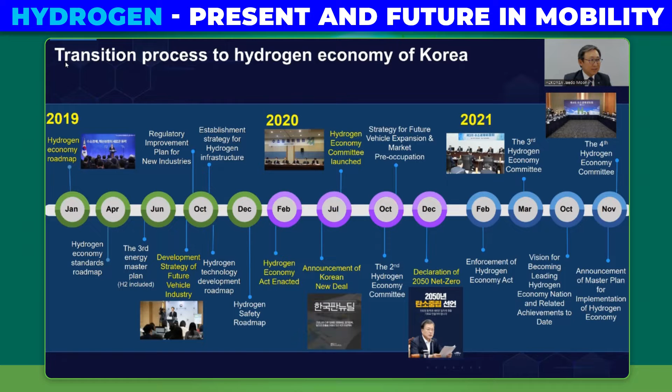In February 2020, the world's first hydrogen law was enacted, a basic law aimed to foster the domestic hydrogen industry. In December of the same year, Korea declared to achieve carbon neutrality in 2050, which became the core of the energy conversion policy. In November 2021, the basic plan for implementing the hydrogen economy in Korea was established. Now, let me tell you about the current state of the hydrogen economy in Korea.

Korea is pushing for a transition to a hydrogen economy for carbon neutrality in 2050, and is creating a hydrogen ecosystem to revitalize the hydrogen industry. Currently, about 22,000 hydrogen cars are supplied and operated in Korea, with 157 buses and 20 taxis in operation.

In addition, 162 hydrogen refueling stations have been built and operated across the country, and about 250 stations are expected to open by this year. Fuel cell power generation is operated at 53 sites in Korea, and about 790 megawatts of power is produced.

The following is the current status of the hydrogen industry being promoted by local governments in each region of Korea. As you can see here, Korea is promoting hydrogen industry-specific projects such as hydrogen-related cities, hydrogen production clusters, R&D specialized cities, and hydrogen mobility clusters. There will be more business opportunities in the future, and a visible hydrogen society will unfold by 2030.

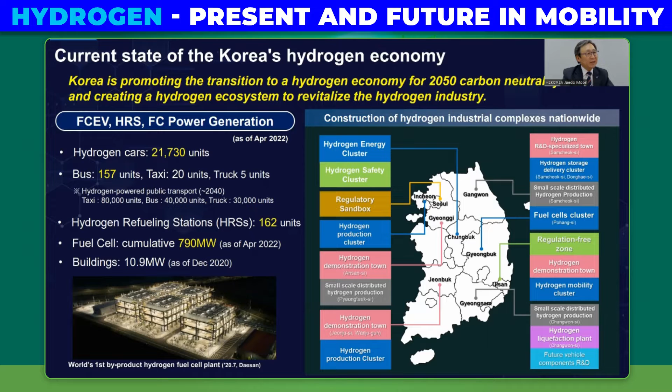To this end, Korea is preparing to expand this hydrogen ecosystem. The development of hydrogen cars is planning to expand to various mobilities. It is also promoting mixed power generation of hydrogen and ammonia in carbon-free electricity production. In order to reduce industrial carbon fuel, we are developing hydrogen fuel use methods in steel, cement, and petroleum processes.

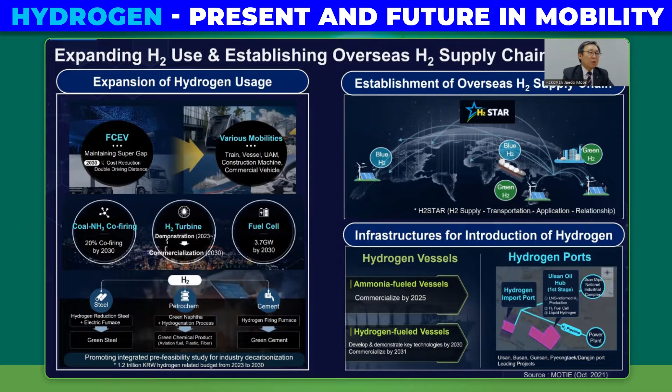In addition, it is promoting the establishment of an overseas supply chain of hydrogen required for the sustainable growth of the hydrogen industry. To that end, we plan to expand our hydrogen infrastructure. Korea has the world's best technology for hydrogen cars, and based on this, a strategy for developing hydrogen mobility was created.

Korea plans to expand its application to mobility such as trucks, trams, and ships, not limited to passenger cars and commercial vehicles. To this end, it will focus on improving the performance of hydrogen mobile fuel cell systems and securing economic feasibility by 2030.

In particular, I would point out that technical cooperation is being promoted between Korean and Czech companies to establish a hydrogen mobility ecosystem. A great technological synergy between the companies is expected.

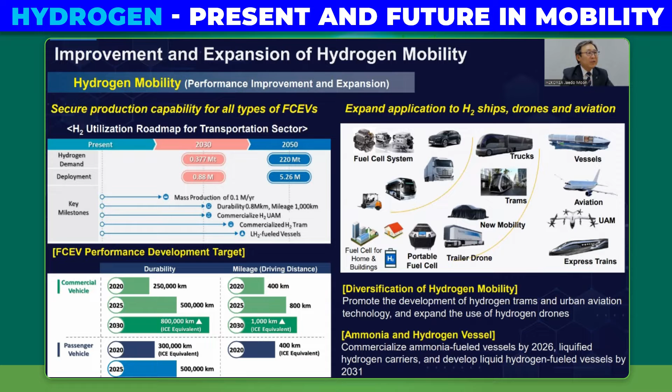In Korea, there are many companies with excellent technologies such as hydrogen charging and hydrogen distribution, including Hyundai Motors. I hope that international cooperation in the hydrogen industry with V4 countries will be actively promoted in the future. We are going to expand the hydrogen supply chain to move into the hydrogen economy.

To this end, we plan to expand the supply of hydrogen through demonstration of hydrogen incorporation by utilizing natural gas pipelines nationwide. To this end, we'll expand the construction of hydrogen pipe networks around the hydrogen production and transportation areas.

By 2025, it will be based on hydrogen ports, hydrogen cities, and industrial complexes, and will be connected to the LNG pipeline by 2030. And by 2050, there will be a piping network centered on 4 major metropolitan areas across the country.

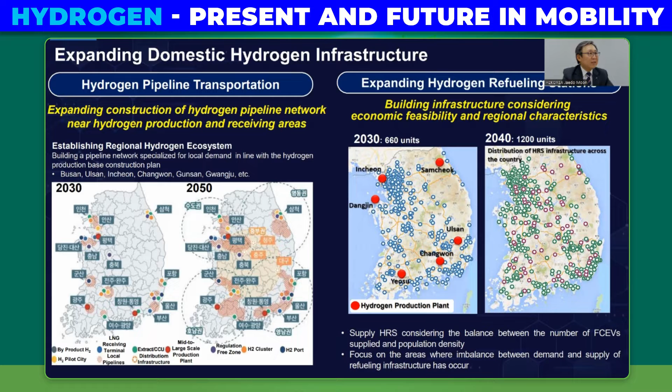In addition, the construction of hydrogen refueling stations and hydrogen production bases will be accelerated to expand the supply of hydrogen mobility. To this end, it plans to secure a nationwide hydrogen refueling network by transforming existing gas stations or LPG stations into complex refueling stations.

Let me explain Korea's hydrogen utilization strategy. Korea plans to gradually reduce existing coal-powered power plants with a goal of carbon neutrality and plans to utilize hydrogen. First of all, from the middle of the 2020s, fuel cell power generation facilities and ammonia mixed systems in coal power plants will be expanded. The ammonia blending method of coal-fired power plants is planned to operate 20% of ammonia by 2030.

In addition, based on the goal of commercialization by 2050, through the development of hydrogen generation gas turbines, we will promote carbon dioxide reduction by increasing hydrogen utilization in the industry. It is also planning to expand the use of hydrogen energy in steel, petrochemical, and cement industries that emit a lot of carbon.

For example, the steel production process will establish a test site for a hydrogen reduction process of 1 million tons by 2030, expand it to 3 million tons by 2040, and completely convert existing furnace facilities to a 100% hydrogen steel process by 2050.

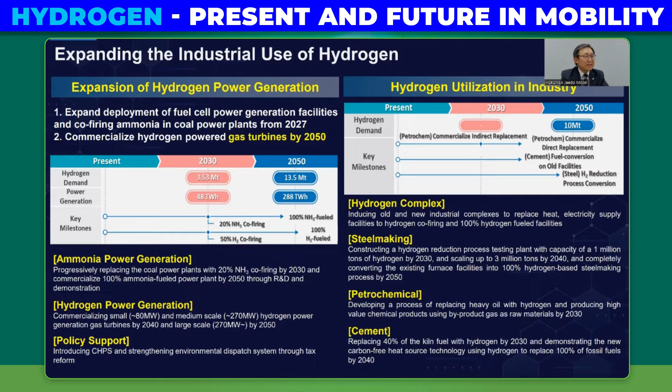In addition, the petrochemical process aims to develop a process that replaces heavy oil, the fuel of a petrochemical process, with hydrogen by 2030. As mentioned earlier, Korea is actively promoting to establish a network to introduce clean hydrogen from overseas in the mid to long term.

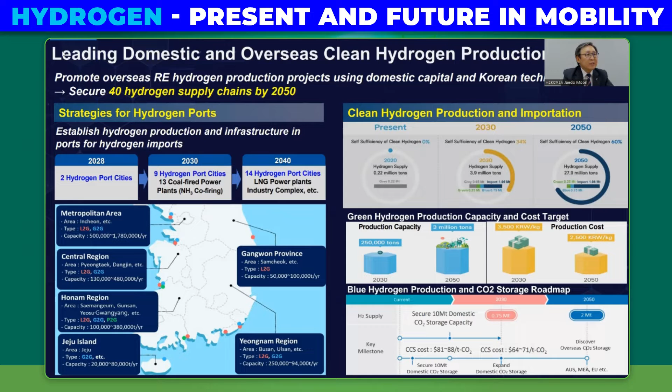Korea is expecting to establish 40 stable overseas hydrogen supply chains by 2050, encompassing both blue and green hydrogen. A hydrogen port construction plan is also being prepared for this. The number of hydrogen ports will increase from 2 by 2028 to 9 by 2030. In addition, hydrogen production and infrastructure construction in hydrogen import ports will be promoted.

Lastly, I would like to introduce the Global Hydrogen Industrial Association Alliance, GHIAA, which was recently established to promote global hydrogen cooperation. H2 Korea, together with 17 hydrogen associations in each country, launched the GHIAA in Seoul to promote international hydrogen industry cooperation. The purpose of GHIAA is to promote the growth of a global hydrogen industry and the expansion

of the international hydrogen market by revitalizing private global hydrogen economic cooperation. Through this, it will promote the transition to a hydrogen society and contribute to overcoming the global climate crisis. The organization will play a pivotal role in promoting private international cooperation with the 18 hydrogen industry associations. Please support and join us in the initiative.

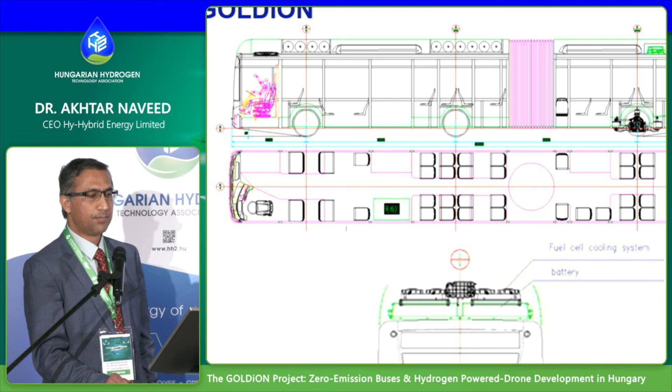So our idea was to consider 12 meter and 18 meter as the fuel cell bus, and the smaller, which is 8.5, and the 12 meter is a battery electric bus. The reason behind, I think many of you already know, is that when you look at the battery drivetrain, there is a tipping point when it comes to the range, because the longer you want to drive, which means a long haul drive, the battery becomes heavier and heavier. And there would be a point where it doesn't make any sense to use batteries.

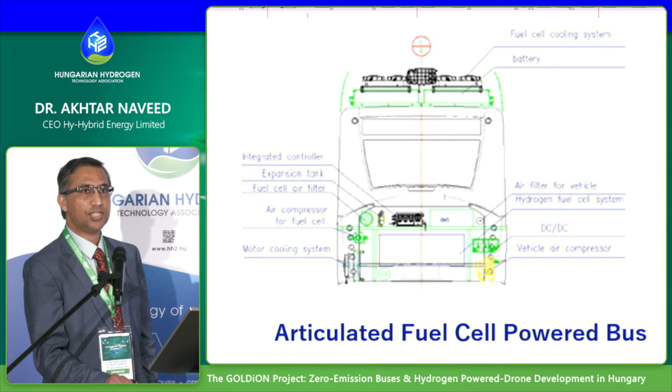That's why, if you look at the ships, for example, specifically the planes, the long haul planes, once you go to, let's say, 200 or 300 miles, then you have to only look at hydrogen as a solution, because battery would not work there.

So in our analysis, we did quite a detailed economical and also technical study to find out where the tipping point would be between these drivetrains, and decided 12 meter is the ideal tipping point. So if we are below that, then we can live with battery. And if we are above 12 meter, then the only solution which makes sense from a driving range would be the fuel cell bus, and that's the tipping point.

Now, looking at the pictures of the bus, many of you may not have heard about that, but the reality is these E9 and E12, which are the battery electric buses, are in Hungary right now. And the H12, which is a 12-meter fuel cell bus, has been recently completed in cooperation between Hyzon Motors and us. And many of you know Hyzon Motors is a big player when it comes to fuel cell engines.

So these guys are supplying the engines to those bus families, for the 18-meter fuel cell bus and also the 12-meter. The 18-meter is the one which is in a development stage. The other buses are ready.

With respect to the 18-meter bus, I'm just giving you a highlight of how the drivetrain looks. So you would see on the roof of the H18 bus there is a fuel cell cooling system, next to that there is a battery, and you can also see the hydrogen storage tanks. They are located on the roof, and there are nearly 12 hydrogen tanks powering this bus. And again, we decided to extend the range as much as we can, but there is a limitation on how much load we can put onto the bus.

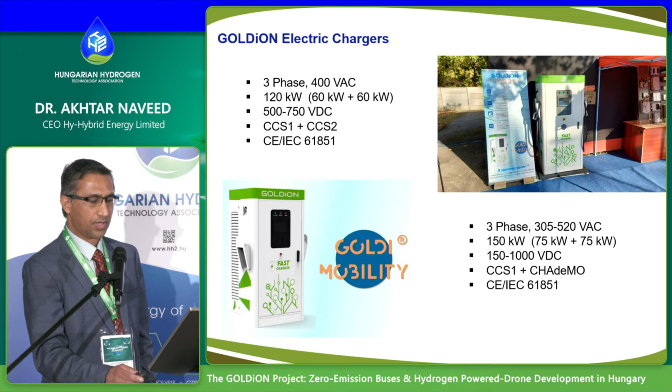So moving on, I think it's less relevant for this conference, but as I mentioned, I like to be hybrid with hydrogen. So these are the electric chargers which are used for our battery buses here as well.

So that's why we are looking at other, local solutions, where we can find some kind of mobile refueling stations. In this case, it is a very small station where you can refuel up to 200 kilograms a day.

And this could suit like 4 to 5 buses a day, basically. So if you think about each bus carries 40 kilograms, you can easily refuel that. So the idea behind it is we are in a cooperation, and today we have a partner here. We are again lucky today. We have a partner here with whom we are discussing this partnership and finding out if we can have a cooperation together, either as a contract or as an MOU. We will find out today. And the idea is to have our own customized refueling station for our buses.

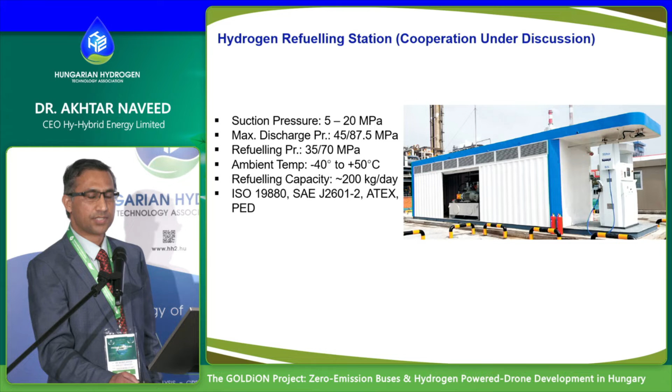The 18 meter. So I'm going into deeper detail now for the 18 meter. As I mentioned, it is the focus for us because it is a very innovative kind of bus design. The 18 meter bus is a special plug-in hybrid, so FC PHEV, and this runs both on hydrogen as well as electricity. It is an M3 category low floor bus, and this is in the last stage of the assembly. I will show in a later slide. And our plan is to have a full European approval for that, so that once the bus is ready, it can be used anywhere in Europe.

The bus is equipped with a 100 kilowatt fuel cell system from Hyzon Motors. It has a high voltage battery and a 250 to 350 kilowatt electric motor as well, 12 hydrogen tanks at 350 bar, and it has a CCS2 type electric charger as well to recharge that bus. Further detail on that bus, so I would give you the whole layout where the bus currently stands and what we have done in the past 3 years. Knowing that there were COVID challenges in our way, there has been slight slippage in the project, but we will continue working with our partners to make sure that it is on track.

So we started the bus design from a layout design and then moved to the chassis body and a structure design. We also completed all the drivetrain component purchasing. This started, I think, somewhere in early last year. Then we completed the chassis mechanical part. So all the chassis structure was done. Body assembly was completed. We did the welding production as well. And the current status of the bus, as you can see in the pictures, is that it is sitting at a paint coating stage, which means the painting of the bus body has been completed.

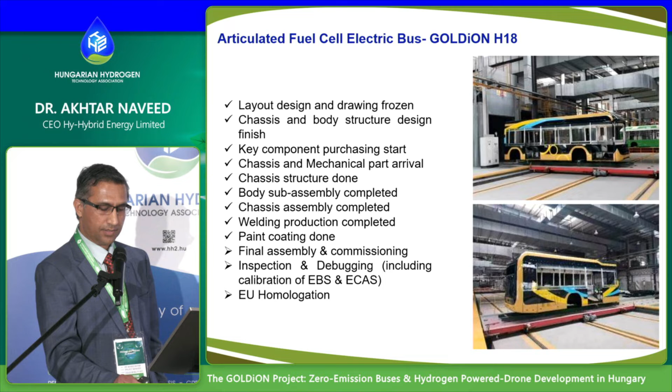The other project you may have seen in the exhibition hall upstairs. If you have not, I suggest go upstairs and you will find our hydrogen powered drone there. So the hydrogen powered drone is another extension to the mobility projects which we were looking at apart from the buses. In this case, we are targeting this drone to be locally assembled in the coming months. At this stage, it is a fully assembled system. But the idea is to replace the hydrogen tank, which is sitting on the top of that drone, with a much lighter one, which can increase the range. Currently we are talking, roughly speaking, 4 to 4.5 hours of flying range.

But our idea is to have a much thinner, much lighter tank, type 4, for example. This is a type 3 in this case. Type 4 tanks would be much lighter. And going forward, there is a lot of R&D ongoing. People are talking about type 5 as well. So we can think about how we can further extend the range. That's one consideration. The other consideration is, based on our expertise on the fuel cell side, there is a fuel cell in this drone, and we are looking at how we can get a much lighter fuel cell, which can give much better power in terms of the dynamics of the flight.

So these are the two active areas to look at, and we are in continuous touch with our partnership to find out how we can achieve these two things into the best kind of status. The third thing we are looking at is European homologation for the whole system, which means all the components in the drone system are fully certified, and that's why we are working very closely on how we can get certified. Like the fuel cell system should be certified, the hydrogen tank should be certified, so that we can run these trials in other parts of the world.

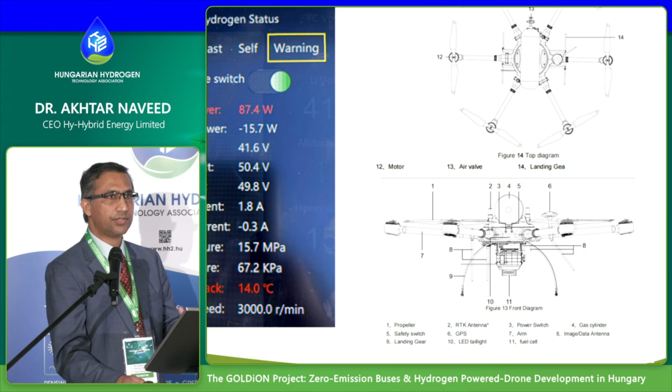There is a hydrogen tank as well in this drone, which tells you how much pressure is there, because if the pressure is running out, you are losing your range. So all together it is working in that case. Another project. So I'm slipping now out of the GOLDiON project, just the last one or two slides.

As I mentioned before, when we talk about mobility or any hydrogen related projects, anything which consumes hydrogen, it came to my attention, to be honest, in the last two years, 2020 onwards, everybody started talking green hydrogen. If I look back at my history, in 2001 nobody even knew what the colors were. Up until 2015, 2016, nothing about any colors. And suddenly, within the last two years, every project, any news, green hydrogen, green hydrogen. So what we did is the same thing.

The initiative kicks off because everybody understands the Saudi NEOM project is claimed to be the world's largest project for green hydrogen production. So we came up with the same version of the Saudi NEOM project. It is roughly a fourth or fifth of the size of the Saudi one. The Saudis are talking 2 gigawatts and we are talking 400 megawatts, so one fifth of that. And the idea is very similar.

Make green hydrogen in a renewable rich location in Pakistan via solar and wind, because the city I belong to is Karachi. When I am there, the temperature could be as high as 45 degrees Celsius, and you can have 365 days of solar. So you have enormous solar energy there. Likewise, you have the wind there. So the idea is to connect the solar and the wind to have green hydrogen produced.

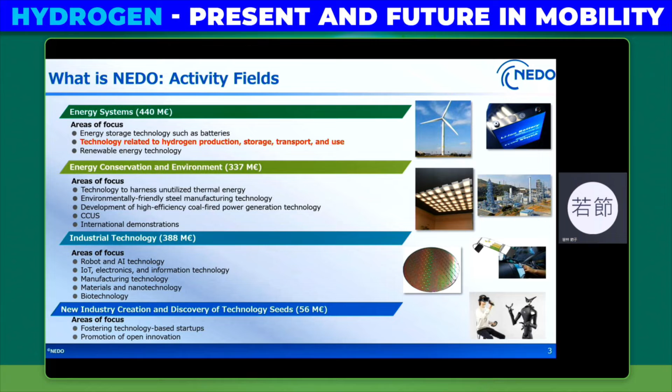Okay, let's begin. Firstly, I'd like to introduce NEDO itself briefly. NEDO is one of the largest public funding agencies in Japan, with two main missions: addressing energy and global environmental problems, and enhancing industrial technology development. Our activity fields are widely spread across a variety of technologies, such as robotics, AI, IoT, or materials, as well as support to startups. One of our main activities is related to energy systems. In this context, NEDO has been supporting hydrogen-related technologies for a long time.

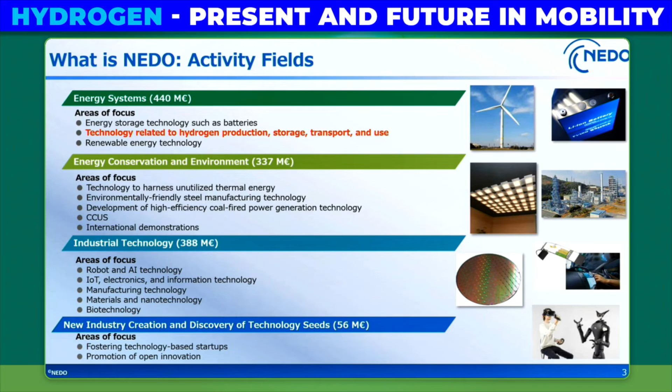NEDO has 6 overseas offices, and our Paris office covers all of Europe. Historically, we have had demonstration projects in Europe, such as in Lyon in France, Manchester in the UK, Lisbon in Portugal, Ljubljana in Slovenia, or Niedersachsen in Germany. Now, 2 projects are at the feasibility study stage to build up demonstration projects. Both projects are related to hydrogen technology.

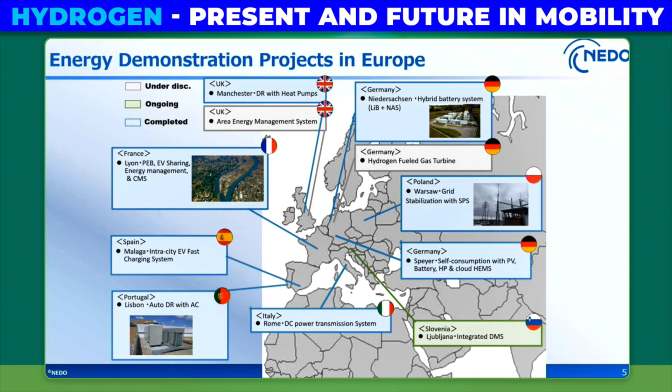As the latest one, last December, the German energy company RWE and Kawasaki Heavy Industries announced that they started building the world's first 100% hydrogen-capable gas turbine on an industrial scale in Lingen, Germany, with NEDO's support. NEDO Europe wishes to implement more such projects in Europe to address energy and global environmental issues through the cooperation of Japanese companies with European partners.

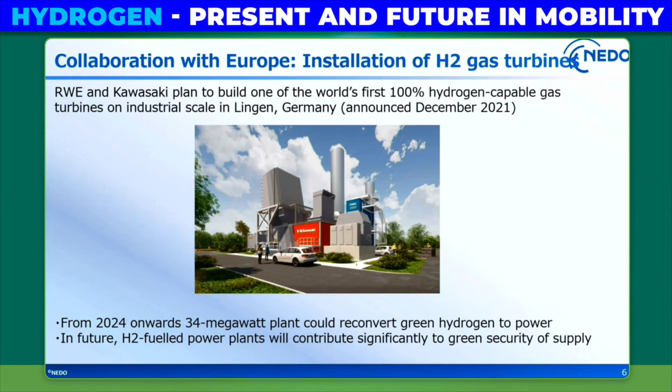Secondly, I will show you the outlook of Japan's energy situation. Here is the basic background of Japan's energy situation. The left figure shows us that Japan depends on a lot of fossil fuels even in 2019.

Besides, at this moment, it is very difficult to use nuclear power largely, since a part of the public opinion is afraid of it due to the accident of Fukushima nuclear plant in 2011. CO2 emissions are shown in the right figure. CO2 emissions from the energy transformation sector, mainly power generation, account for about 40% of the total energy-related CO2 emissions.

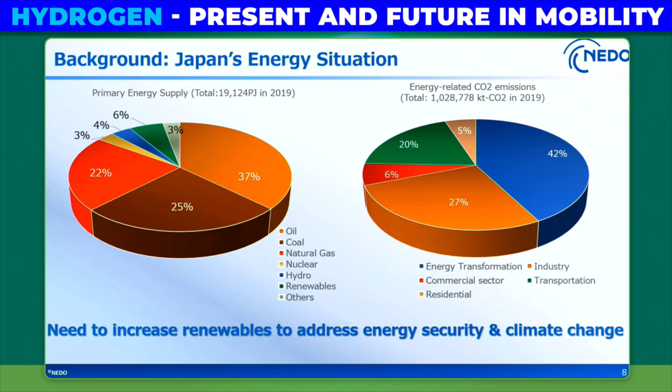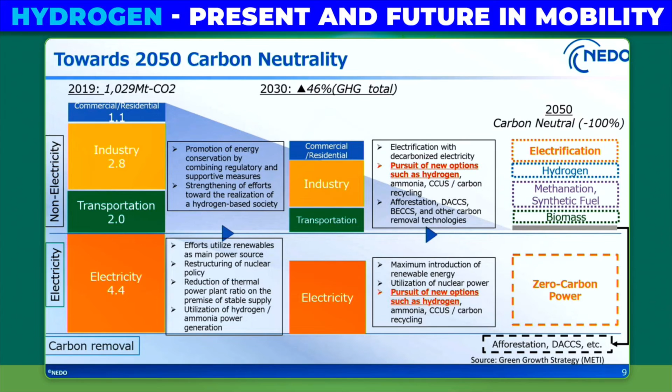In order to realize such expansion of the usage of hydrogen, we will do our best not only for the supply side, but also the demand side. As for the hydrogen supply, we will utilize hydrogen from overseas and domestic renewable energy hydrogen from 2030. For this reason, we will proceed with technological development and scale-up. On the usage side, we will first expand fuel cell mobility. From automobiles, we will promote the use in ships in 2030 and in aircraft in 2050.

In terms of electric power, hydrogen power generation will start in 2030. In the industrial field, we aim to put it into practical use by 2050. We will also promote the introduction of decentralized cogeneration. In any case, technological development is important. Especially in the next 10 years, we will actively invest in technological development in order to gain a lot of knowledge.

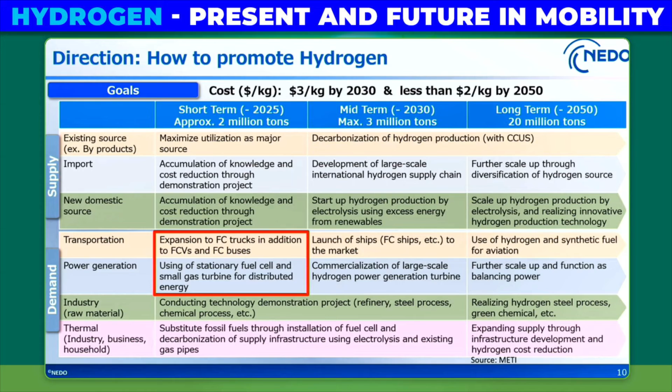Next, I will explain NEDO's activities on hydrogen, especially our flagship project, FH2R, the so-called Fukushima Hydrogen Energy Research Field project. In regards to hydrogen technologies, for many years NEDO has taken a step-by-step approach and has been supporting Japanese companies through funding and project management. In 2009, we launched our residential fuel cell on the Japanese market, and 400,000 have been installed since then. This makes Japan the #1 country in terms of residential fuel cell installation. By improving this technology, Toyota launched the FC vehicle Mirai in 2014 for the first time. To support the enlargement of the market in 2015, Toyota made their patents on FCV open to everyone.

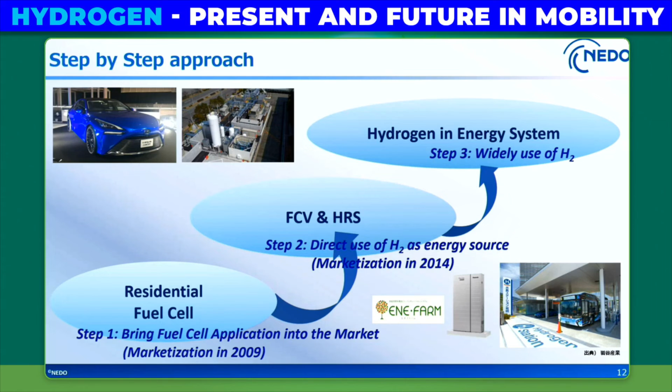As the final step, hydrogen from renewable energy will soon be generated widely, so it's a good time to move into the new age of hydrogen. Here is the history of hydrogen-related technologies by NEDO. In order to produce large volumes of hydrogen from renewables and to develop applications widely, global collaboration is very important. This is why NEDO has organized the Hydrogen Energy Ministerial Meeting every year since 2018. In last year's meeting, 18 ministers from various countries joined. The last 2 meetings were held online because of the corona pandemic, but I do hope that this year's meeting can be held physically in Japan.

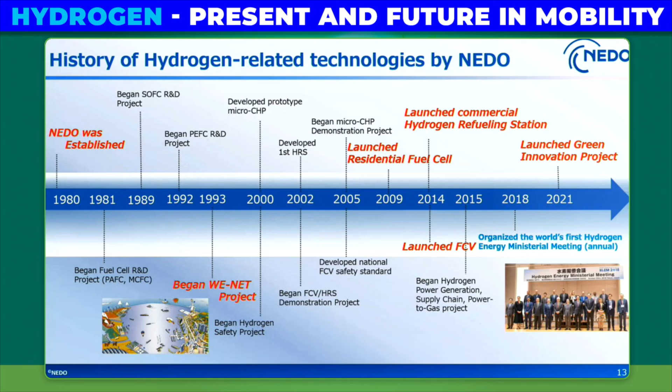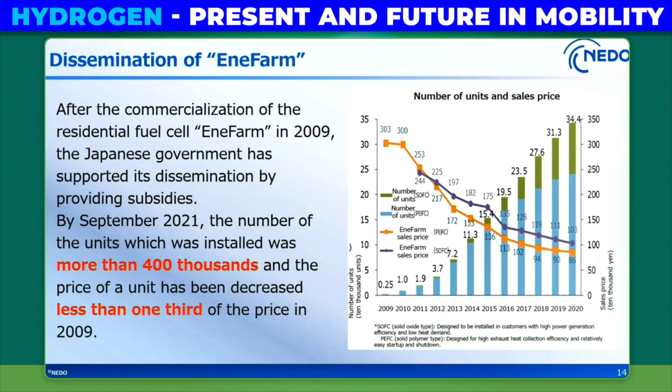After the commercialization of the FC vehicle in 2014, the number of FCVs has not increased dramatically. For further development or acceleration, NEDO and the industrial side thought that further performance improvement and cost reduction were required for the spread of FCVs. And FC would be installed not only in passenger cars, but also in heavy-duty vehicles such as heavy-duty trucks in the future. So recently, NEDO has promoted R&D projects of elemental technologies that enable operation under high-temperature environments to improve durability, contribute to the cost reduction of high-pressure hydrogen tanks, and so on, aiming for practical use after 2030.

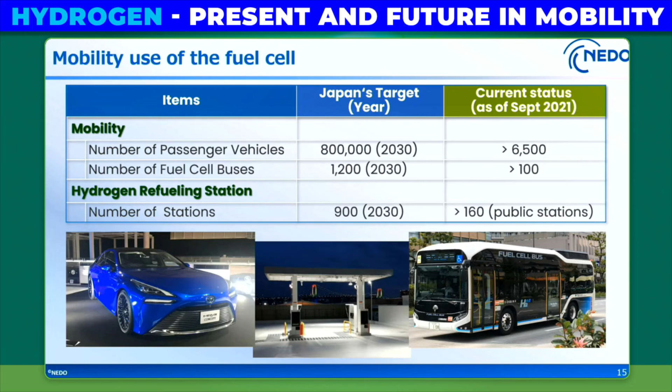FH2R demonstration projects will be conducted until 2023 by NEDO. Project members are Toshiba as project manager, Iwatani as hydrogen supplier, Asahi Kasei as electrolysis maker, and Tohoku Electric Power Company as an electricity operator. The project purpose is to develop a hydrogen utilization business model that optimizes the exploitation of hydrogen as both a commercial commodity and as an energy.

Technically, it aims to realize a new control system that optimizes hydrogen production and supply with demand forecasting for hydrogen. The project site is in Fukushima Prefecture. It is just 250 kilometers away from Tokyo. The site is always open for anyone to visit. Therefore, when you come to Japan after this corona pandemic, please consider having a short trip to visit Fukushima Hydrogen Energy Research Field by simply requesting to us.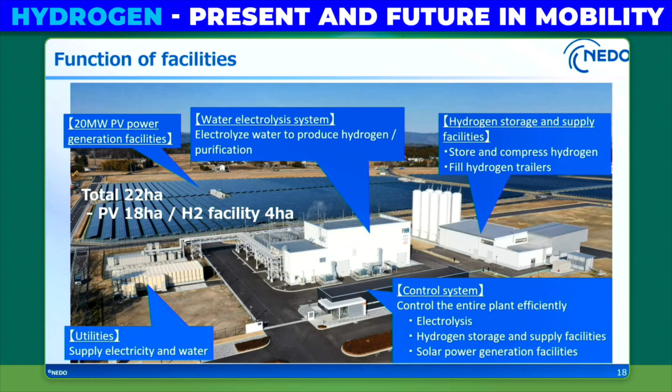Here is an overview of the project site. The total area is 22 hectares. The center premise has an electrolysis system which is powered by 20 megawatt PV power generation. There are hydrogen storage and supply facilities, and then hydrogen is carried from this facility by tank lorry for local usage. These facilities were completed in March 2020, and the demonstration will run until March 2023.

This is inside of one of the facilities, where you can see the electrolysis conducted by Asahi Kasei. A maximum of 10 megawatt of hydrogen is produced by 20 megawatt of PV power. This means that 180 kilograms of hydrogen will be produced per hour, which corresponds to the complete hydrogen refueling of 30 to 40 Toyota Mirai models. We're going to increase the capacity of electrolysis up to 40 megawatt in the near future and possibly to 100 megawatt on the long term.

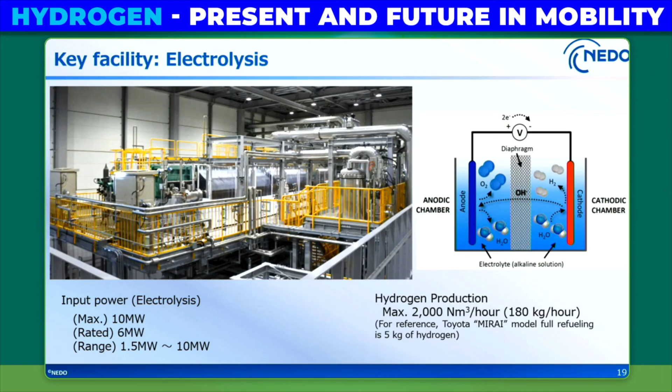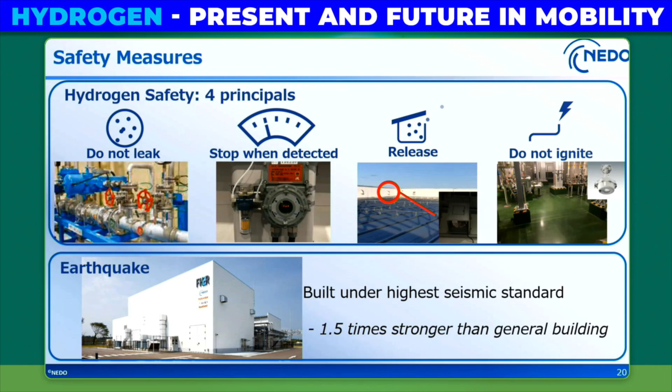This facility has many safety devices designed to avoid explosion. Many experiences gained from the long R&D history taught us how to reach explosion-proof and earthquake-proof status. Therefore, when hydrogen valleys will be deployed in many years, safety must be guaranteed, especially in Japan, that is a land of earthquakes. As a consequence, I believe that Japanese technology would contribute to realize the top-level safe hydrogen society in various countries.

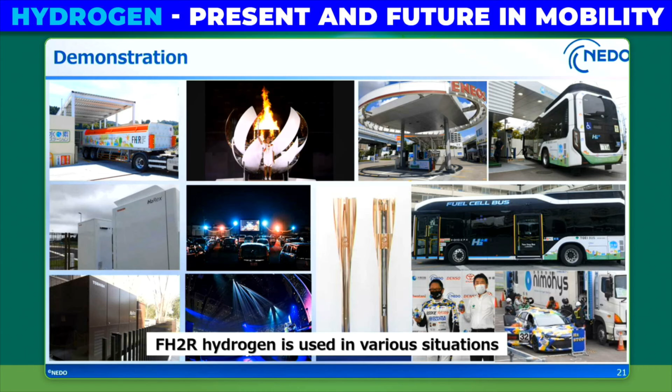As you may already know, in October 2020, the Japanese government declared its ambition to reduce greenhouse gas emissions to net zero by 2050. To achieve this goal, the Ministry of Economy, Trade and Industry (METI) formulated the Green Growth Strategy through achieving carbon neutrality in 2050. To support R&D activity, NEDO started the Green Innovation Fund program. The fund size is over 14 billion for 10 years, which includes hydrogen R&Ds.

To realize the net zero emission objective, NEDO is responsible for the huge fund called the Green Innovation Fund, as I just explained in the previous slide. By using this fund, we have started new hydrogen projects since last year. In these projects, we will implement a hydrogen or ammonia value chain with overseas partners. We will realize the scaling up of hydrogen production in domestic areas, and we will expand end-use applications with overseas partners as well.

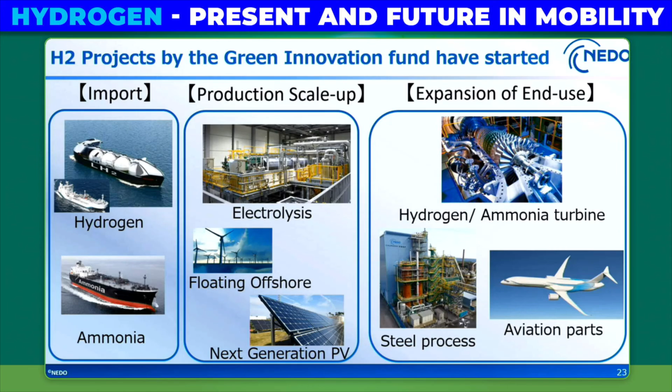Lastly, the current Japanese Prime Minister Kishida is very keen on tackling global warming. Therefore, a new policy called the Clean Energy Strategy is expected to be published this June or July. In addition to the previous strategy, this one will further strongly promote the realization of the hydrogen-based society that counters global warming, especially focusing on energy transformation on the demand side.

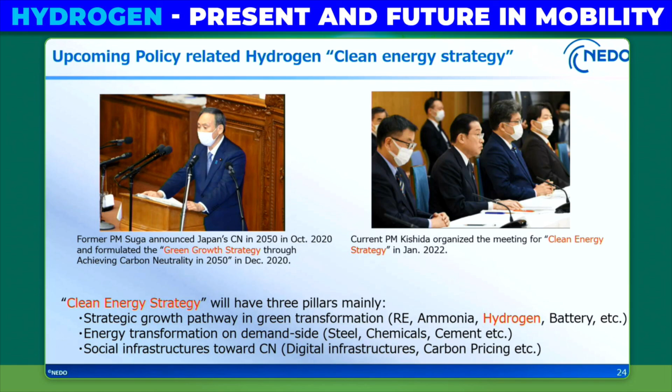Here is the conclusion for today. As I explained to you, in order to realize carbon neutrality, hydrogen is a key technology, and Japan has been strongly promoting it. However, it has just started market penetration, so we need to expand the application and to improve technologies for the future development.

And finally, our goal is to realize a low-carbon energy system, and for that, NEDO has a strong interest in Hydrogen Europe. So I am very happy to make a good communication with all of you taking these great opportunities. Thank you for your attention.

Thank you very much. Wow. Arigato, yeah. It was in Hungarian at the end. Köszönöm, thank you very much.

The organizers just asked me to tell this very important information about the NEDO, which you just heard about. The NEDO is also financing hydrogen projects in Europe, ladies and gentlemen, and its conditions are comparable to those of the EU funding systems and mechanisms. So Japan may be far away physically and geographically, but the helping hand is very close to Europe. So please contact the NEDO.